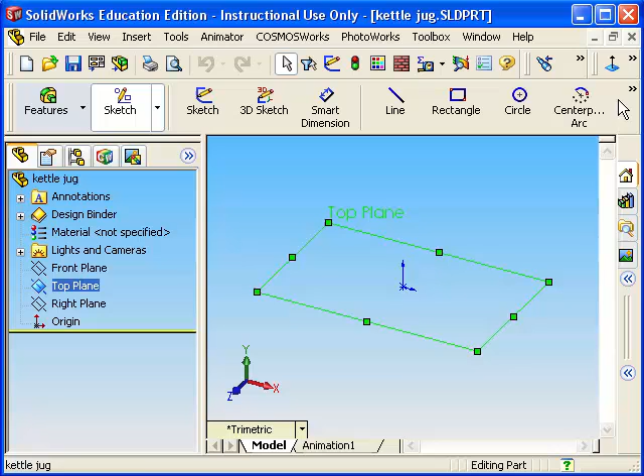After that, our next step is to pick our top plane, look normal to it, and select the circle from the sketch toolbar. Draw out a circle with the center at the origin. Use the line command and just trace out to get the sketch that's in the notes. You can see the auto snapping on for the right angle corner, and once that's done, we'll go to trim.

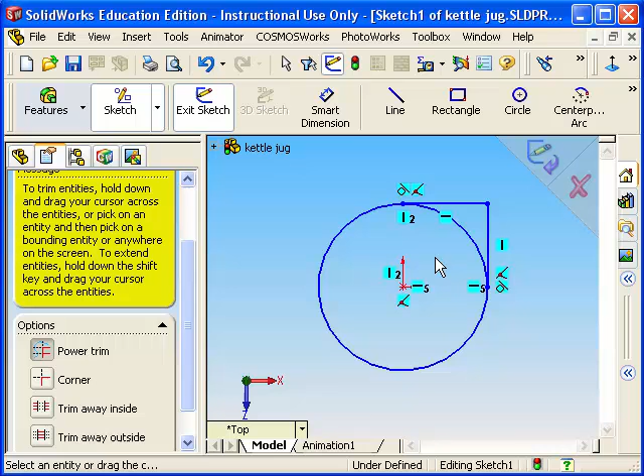We'll use the power trim by pressing the left button, and it draws a little grey line over, and make it cross over your line that you want to cut. Smart dimension the radius of the circle to 55 and rename the sketch by just clicking on it, then press F2 and call it base sketch.

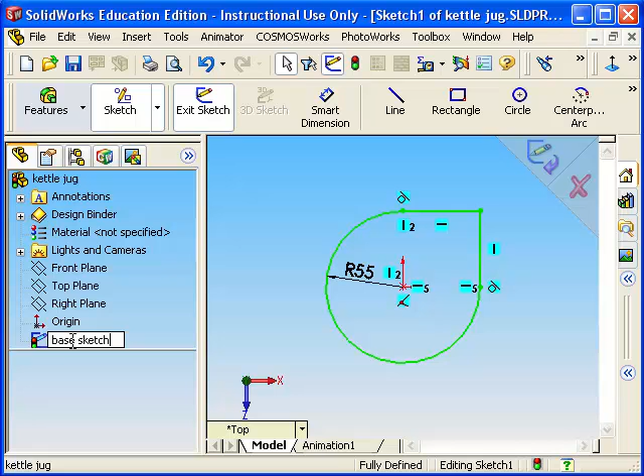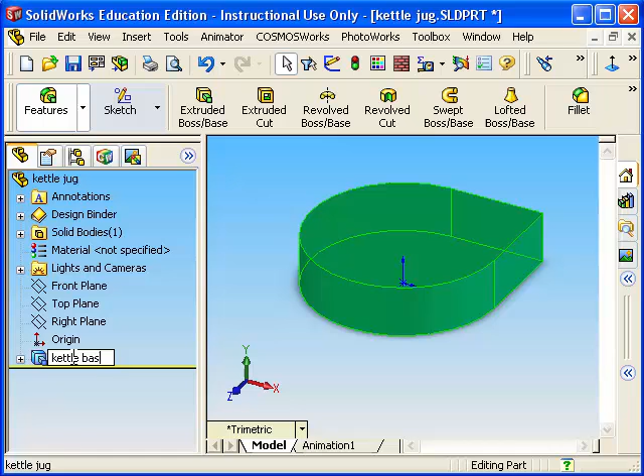Once that's done, features, extruded boss base, extrude in a blind condition 30 millimeters. Then rename the feature base or kettle base. Select the top surface by just clicking on it, goes green, look normal to it, and what we will do then is we will sketch a circle onto the top surface there, roughly the radius 40.

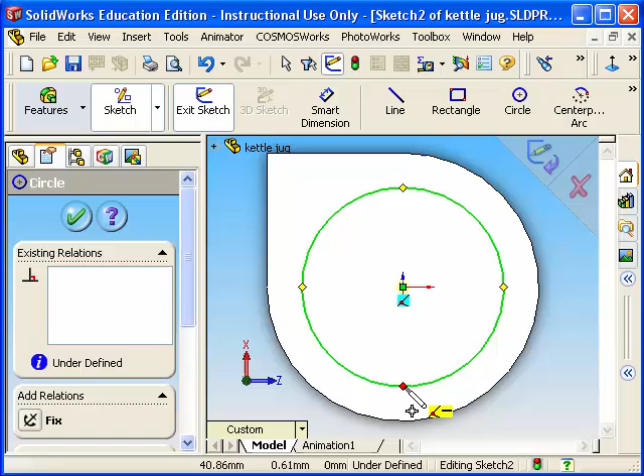Once that's done, we put a point on from our sketch toolbar at this location by just clicking. That will be used later for our spout, and then we'll smart dimension it to be diameter 80. Once that's done, rename the sketch, click on Sketch 2, hit F2 on your keyboard, and we will call it Body Sketch.

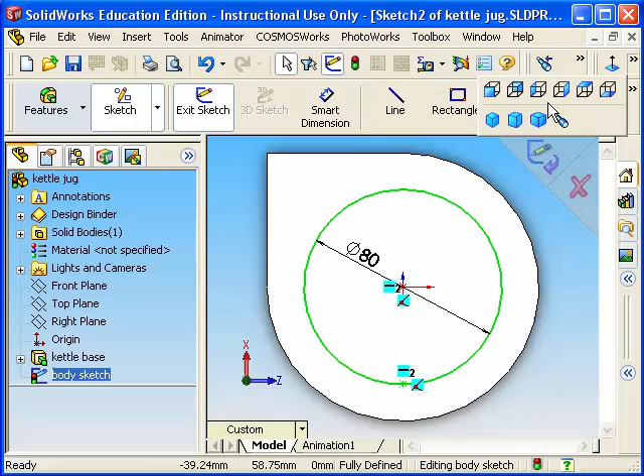And there we have it in 3D. Features, extrude boss base, blind condition, and 120 millimeters high. Tick OK, and we'll rename that then to be Kettle Body.

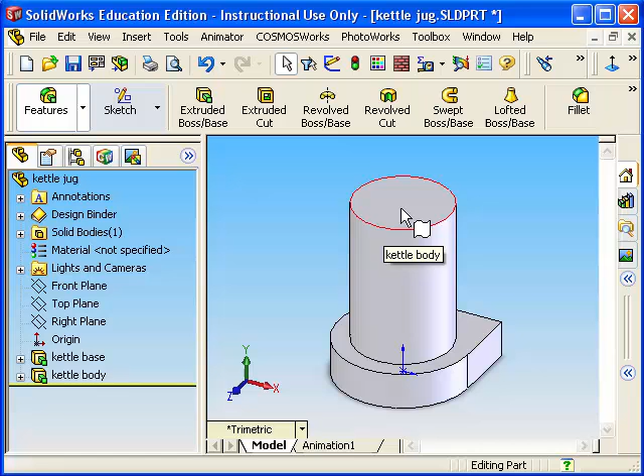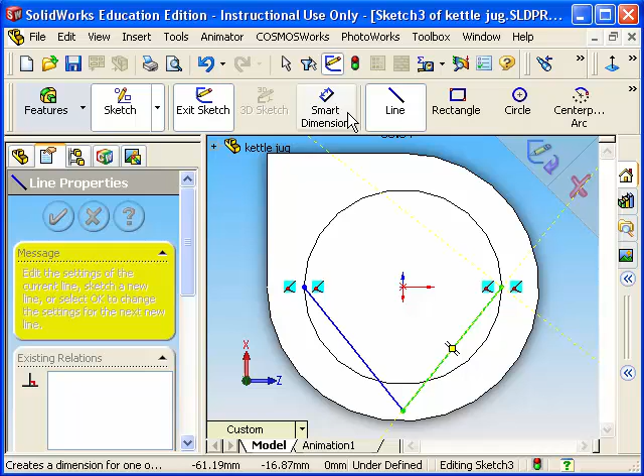Our next step is to select the top surface for creating the top part of the spout. We'll look normal to it. We'll select the line by going Sketch, Line. We'll come out to the left quadrant. We'll draw a line roughly down to here. Make sure that it's in line with the origin. You'll see the snap coming up, and complete it the other side. Once that's done, our next step is to smart dimension from the outer point to the origin, and we'll make it 55.

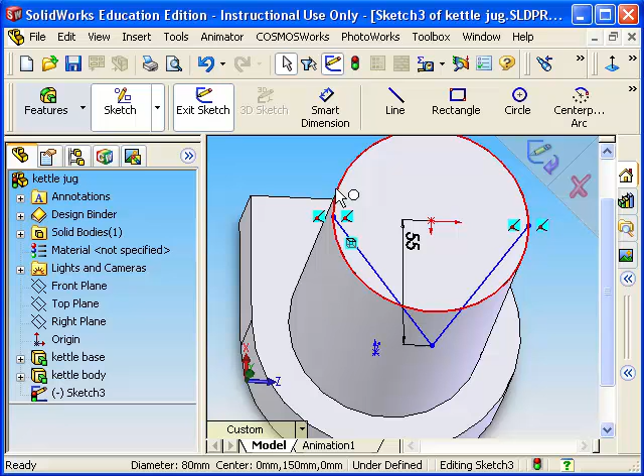Once that's done, we have to get a sketch around the edge of the top of the kettle here. So what we'll do is select the edge, Tools, Sketch Tools, Convert to Entities. What that does is it puts a line at the top edge that was there in the sketch. Now, our next step is to trim away our waste, so we would go to Trim Entities on our sketch toolbar. Same method again, power trim. Left click on the mouse, drag it over your line, and it makes it disappear.

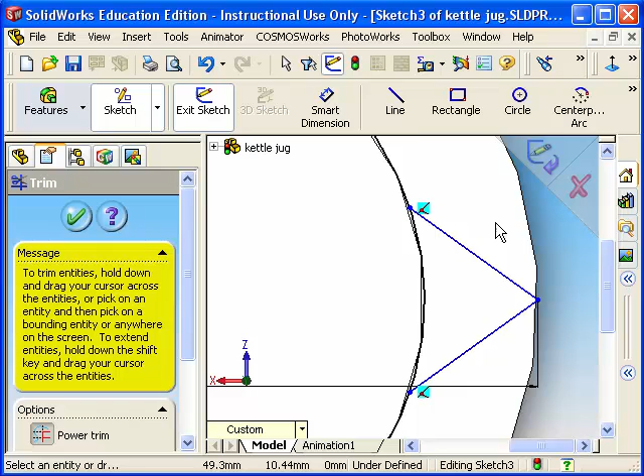Now, our final step is to try and fully define these points. So what we're going to do is we go to Add Relation, and we select the top half of the line here, and we'll just fix it. And we won't worry about the bottom half. Now, our next step is to create the spout. You can see the sketch is still active there. So what we'll do is we'll rename the sketch first. Top spout sketch.

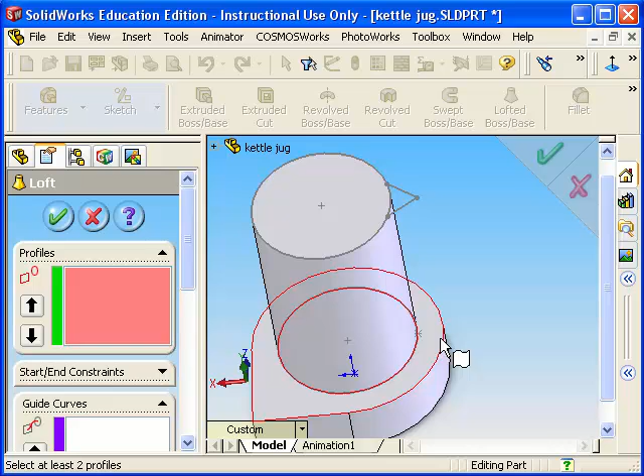Now our next step is to show up the sketch in the bottom, so right click on it and just go to show, and you can see the point has just shown up there. So features, lofted boss base, and we select the point at the bottom. Now what we're going to do here is select the region at the top, so you can just scroll down through the feature manager in the loft boss base and select the region there, and then out on the spout, and you see this preview of the spout popping up. Tick OK once you're happy with it.

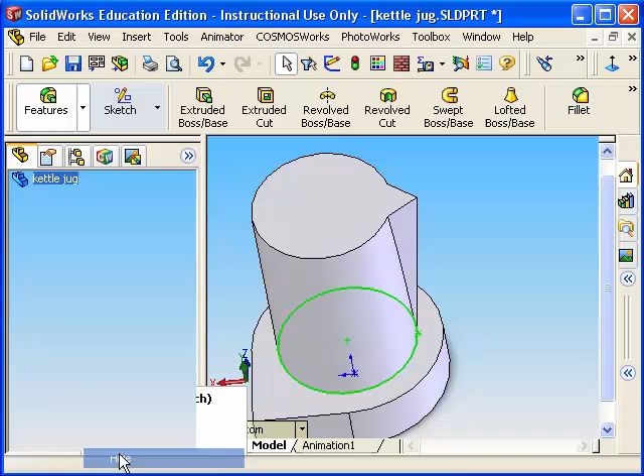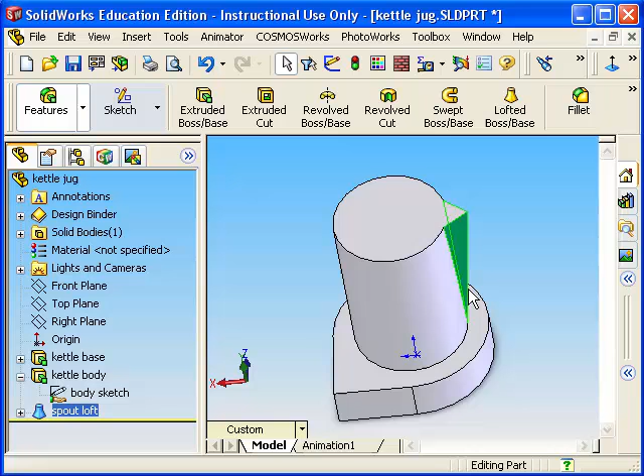Now you can see the body sketch is still showing, so right click on it and hide. And we'll just rename that loft, Spout loft. Following that, our next section is the shell. So we select shell from our features, and it will be a 1mm shell. So type in 1 and select the surface that we want to shell.

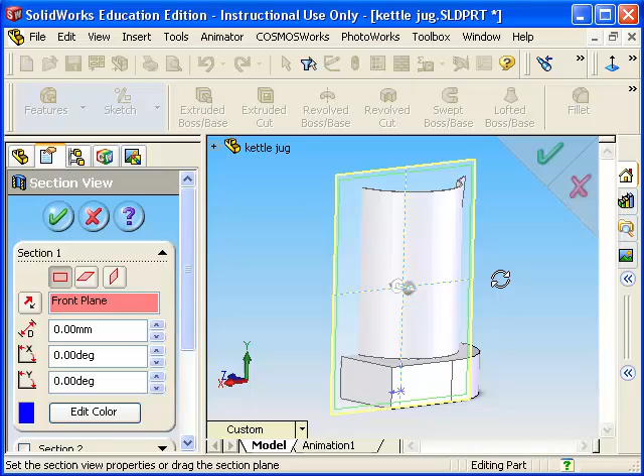Now our shell is going to be slightly different here. I'll just show you why. So we'll just tick OK, and you can look down and you can see that it's hollow. And I'm just going to open a section of it just to show you something here. Now, down at the bottom here, we want the base of our kettle to be solid, but it has been shelled out. So what we'll do is we'll just knock off the section there and we'll delete the existing shell. So just right click on it and scroll down to delete.

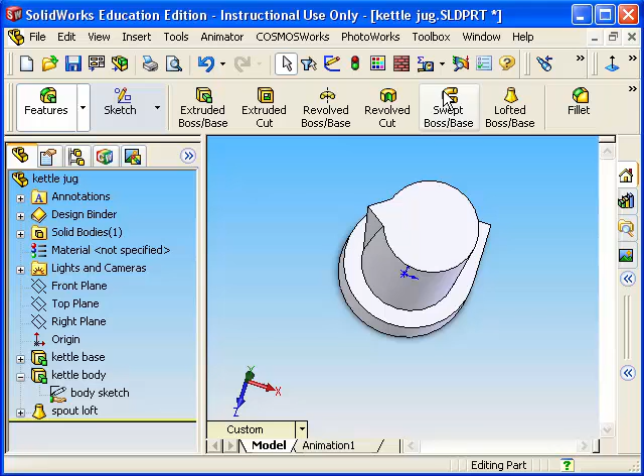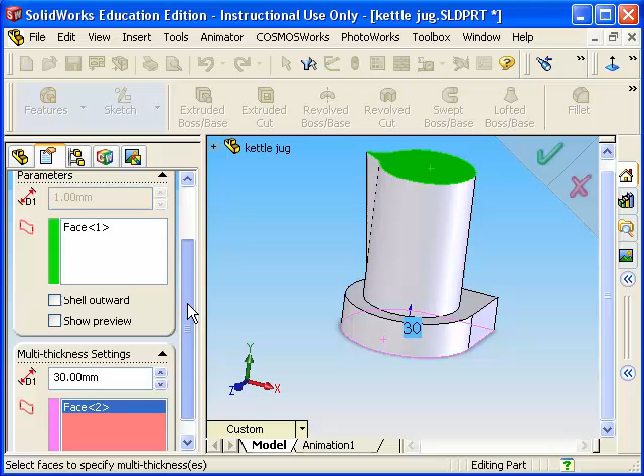Now once that's done, we'll just open up shell again, and we're going to use a multi-thickness shell. Same again for the top, and just scroll down here and you have multi-thickness settings. So we'll just click down here, that's the face that you want to keep, so we want 30mm thickness at the bottom, and we select the base. And then tick OK, and we'll just have a look at it in the section again. We'll just rename it Shelled Kettle.

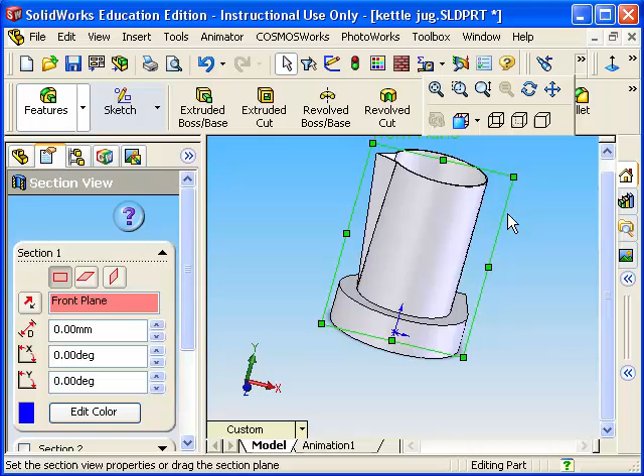Look at a section of it, and you can see there that the base of it now is solid. And that's what multi-thickness lets us do. Now our next job is to put on the handle, so we look at our front plane, normal to. We'll open up the sketch toolbar and recreate the sketch that's in the notes.

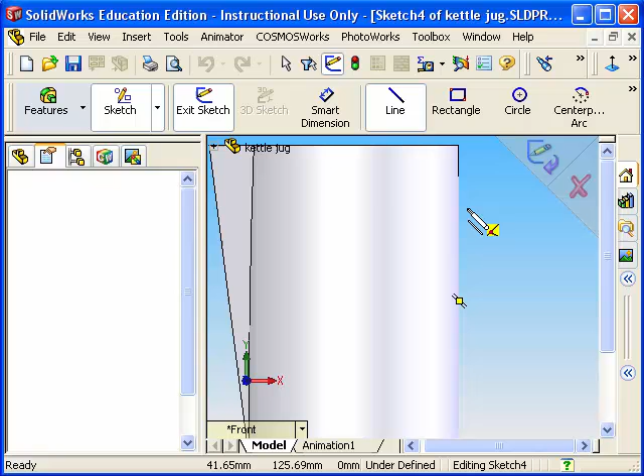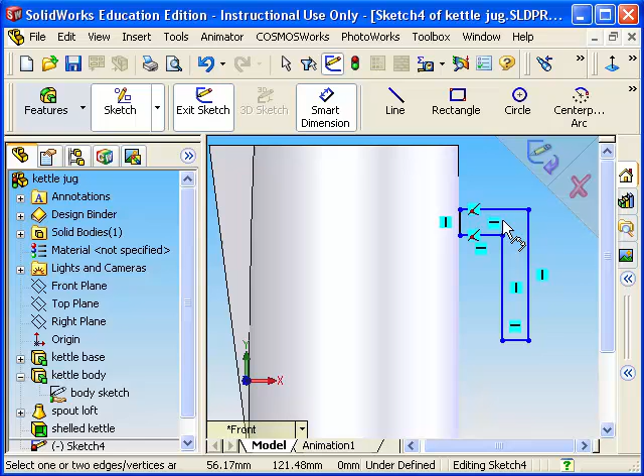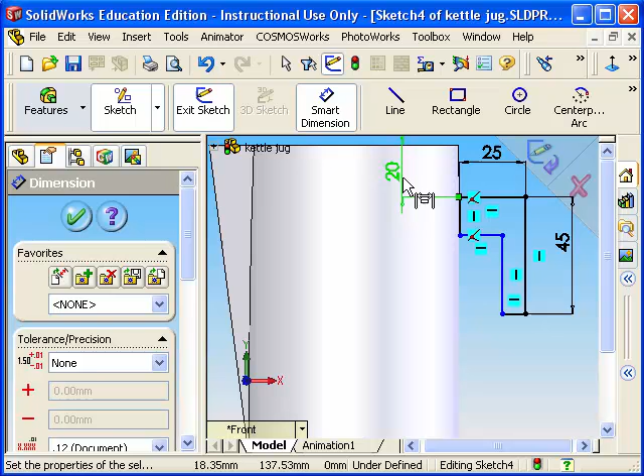And don't forget to close the profile. Now once that's done, we smart dimension it with the dimensions that are given: 25, 20, 45, 10 and 10 here. Now you can see our sketch. Our next job is to rename that sketch, and we'll call that handle sketch.

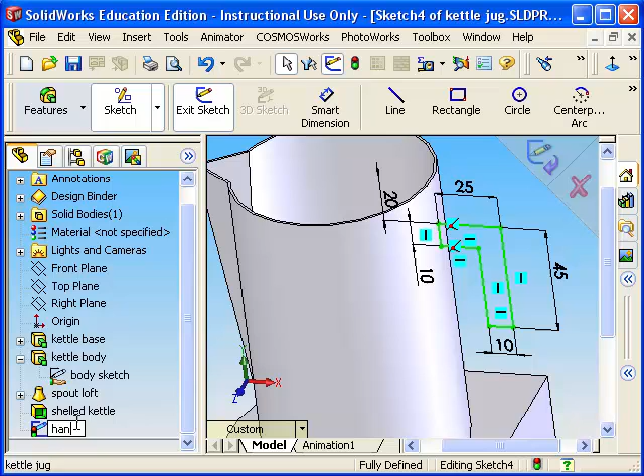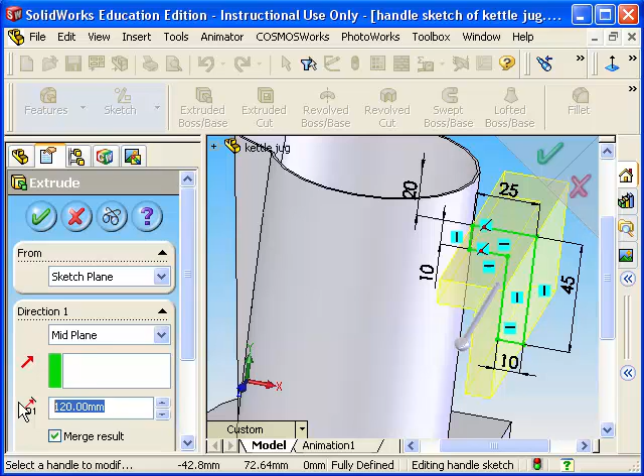We will extrude then in a mid-plane condition. You can see there it's over emphasized, but that it doesn't line up with the full body of the sketch. So what we'll do is we'll just make the thickness that we want. There will be a little gap that we'll just zoom in on. Now we'll just rename it extruded handle.

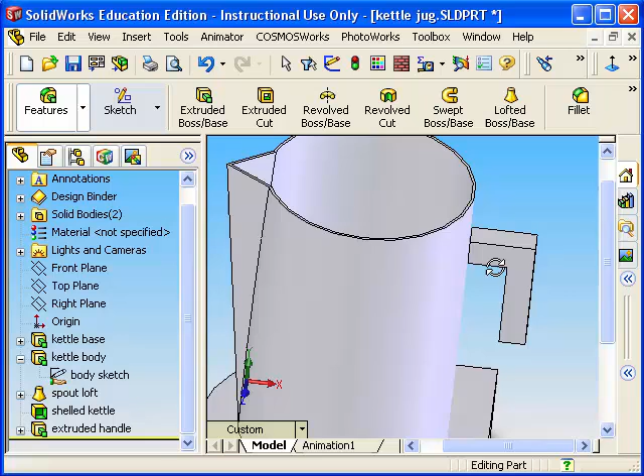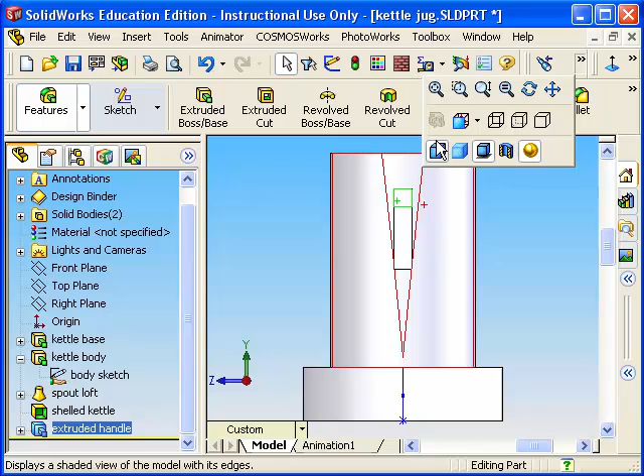And since it has been extruded, you can see that there's a gap between the handle and the curved body of the kettle. So what I want to do here is we just zoom in and we select the surface there by just clicking in on it, and we look normal to it, and we look just around from the other side. Then we're going to look at it in a wireframe model with hidden detail.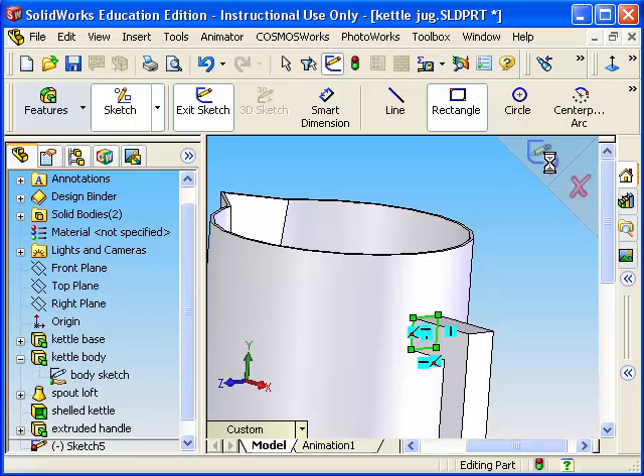And we'll just zoom in up here, and we're going to recreate a sketch of a rectangle. So just select one of the corners, drag it to the other corner, and that's your sketch. It will be fully defined. Then we'll just turn it back on shaded with edges. And we'll rename the sketch first, and we'll rename that sketch handle face sketch.

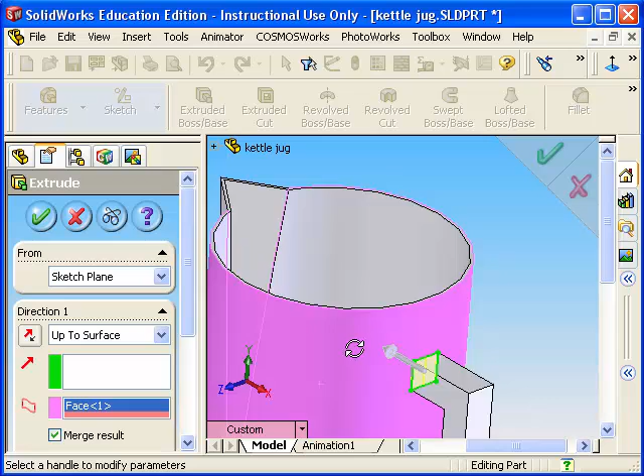Once that's done, we will then extrude up to surface. So you just choose up to surface and we select the curved surface, and what it does is it fills in the little gaps there. And we rename that then handle face extrusion.

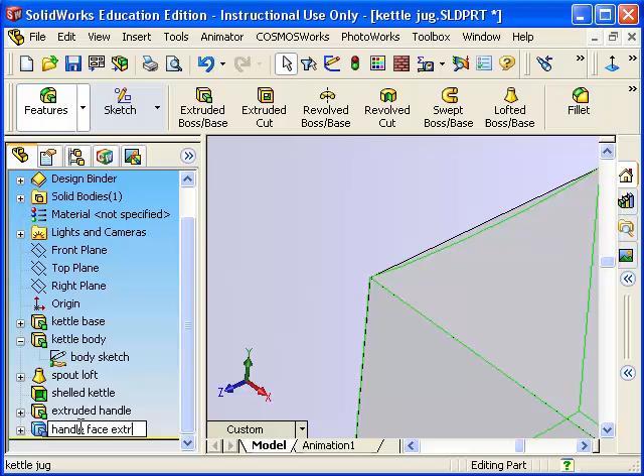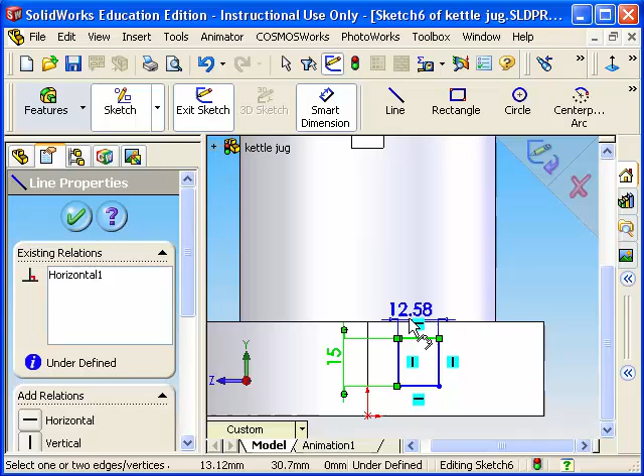Our next step is to put on the buttons for the kettle, and we select this face down here, and we look normal to it, and just zoom in on it a bit. Sketch a rectangle down here for one of the buttons, and we just smart dimension it with the dimensions there: 15, 15 again, then 8, and 12.

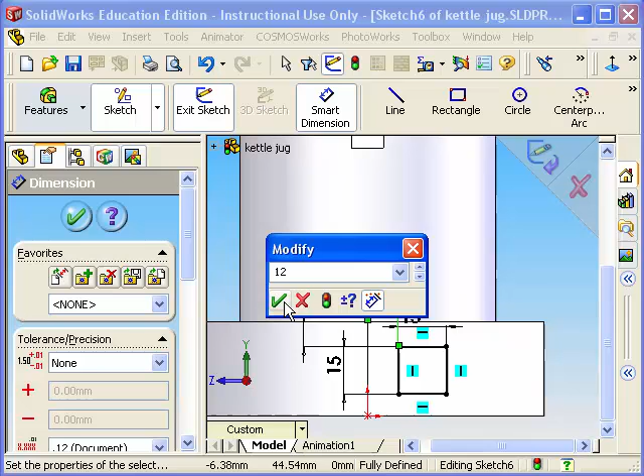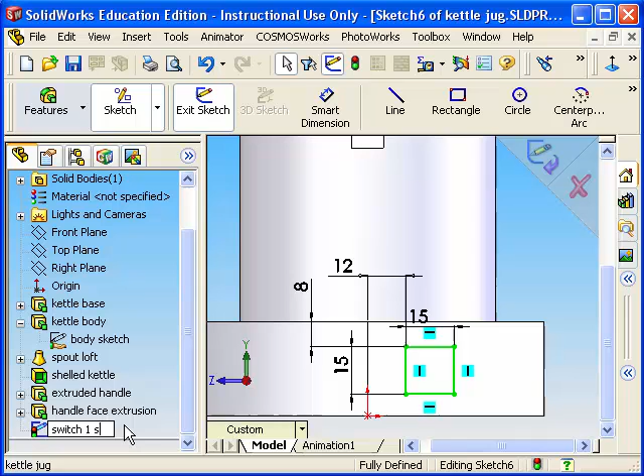Now, once that's done, we'll rename it first. So we'll call it Switch 1 Sketch. Click on F2 on your keyboard. And then Features, Extrude Boss Base, and 6mm. And there it's extruded, and we'll rename that Switch 1 Extrusion.

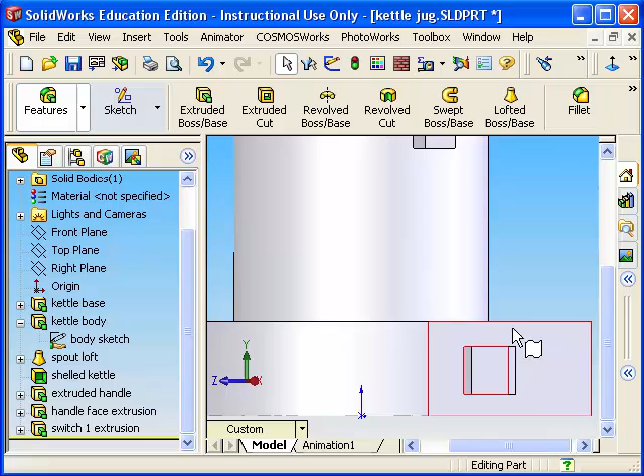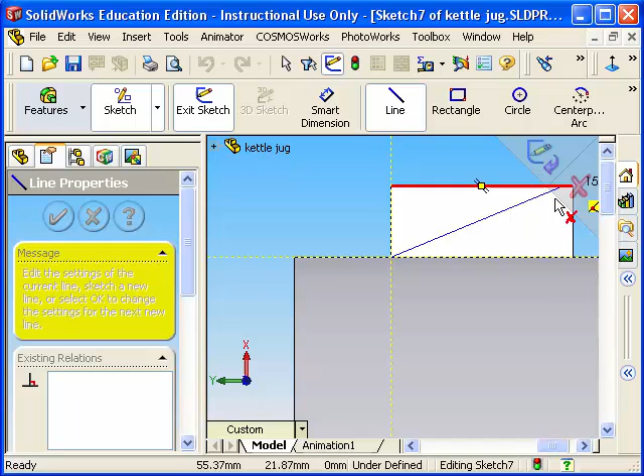Now that that's done, we'll look at the side surface of the switch, select it, and we look normal to it. And we're going to cut away half of that. So we'll go Sketch Line, join one corner to the other. Now, once that's done, we'll call that Switch Surface Sketch.

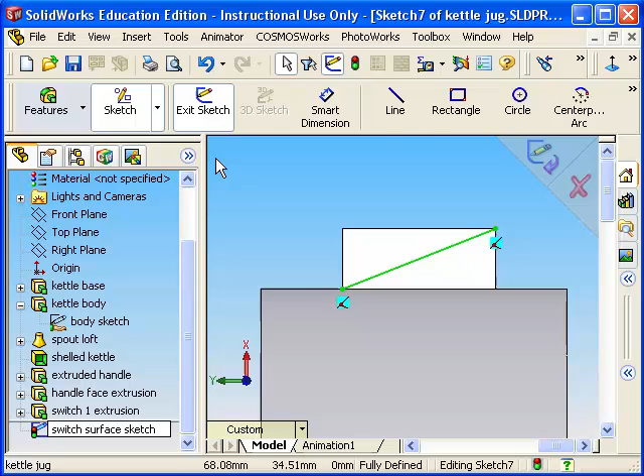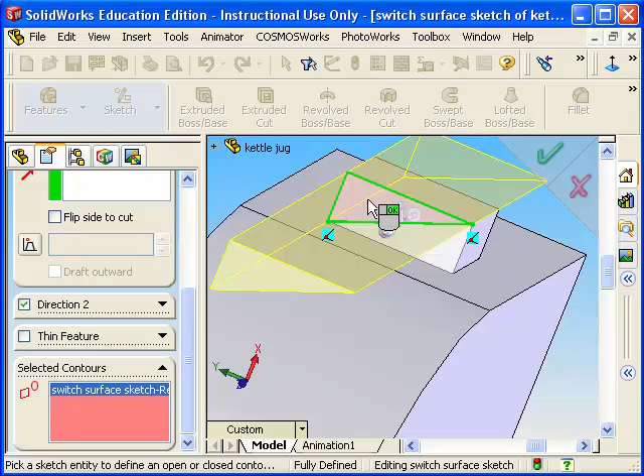Another option with that would be to draw the full profile around of a triangle, and then it will be a cut extrude. So we're going to go Features, Extruded Cut, and this time it will be through all. Now we're going to scroll down in the Feature Tree to Selected Contours, which is regions that you can cut, and it lets you pick. And we'll just pick the upper half there, and you can see a preview of it done. And we'll call then that Switch Surface.

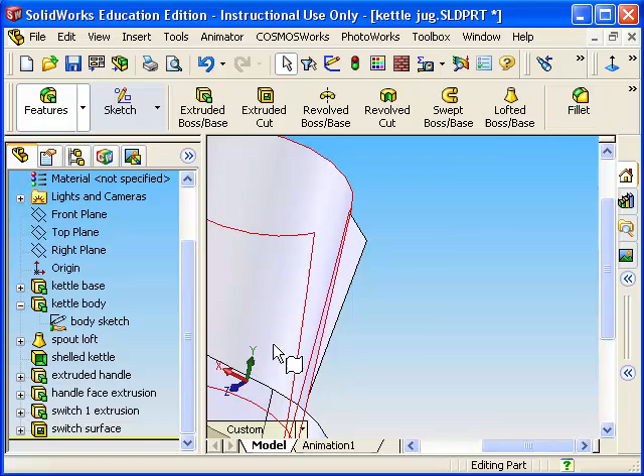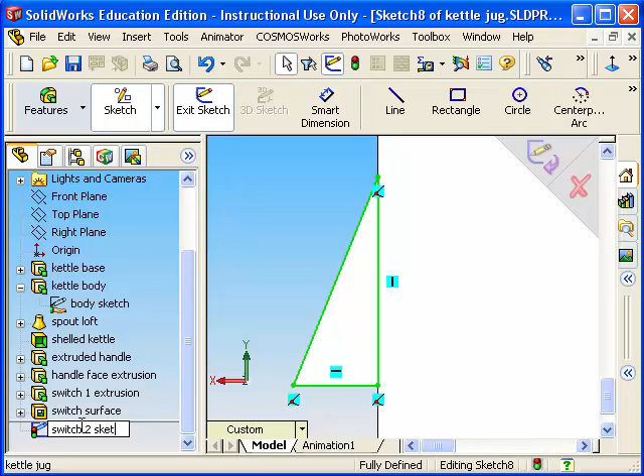Once that's done, then we select the side surface of the switch, look normal to it, sketch, and we just draw out the outline of the profile with the line command. Create a triangle, and then we rename that sketch Switch 2 Sketch. Followed by that, then we extrude it 15mm. Now it's important once it's 15mm extruded, to knock off merge result, because it will join the two switches up and you won't have a line of definition between the two of them. And we just rename that Switch 2 Extrusion.

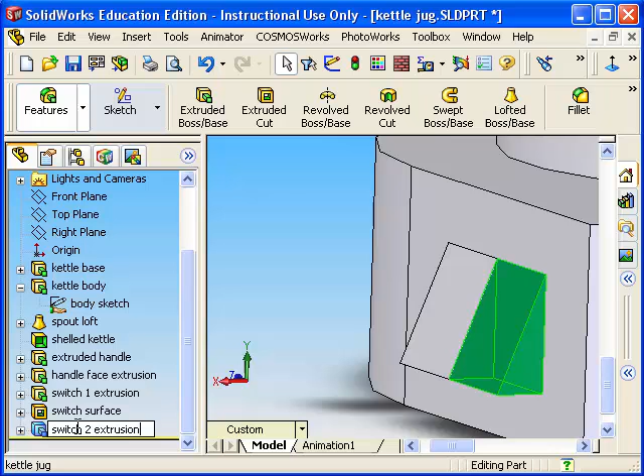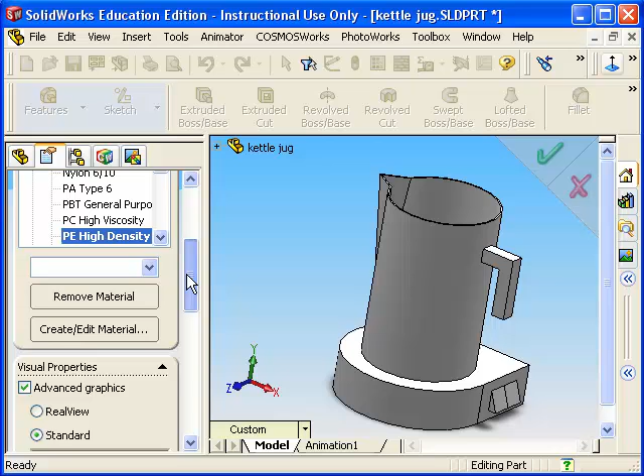Now our next step is to edit the material, and we right click and edit material, pick plastics, polythene high density, and we'll just tick OK. And we'll turn on the RealView graphics. Now tick OK, and there you have it. Now to put colour on, RealView graphics won't let you do it, so just knock off the RealView. That's the little golden ball symbol.

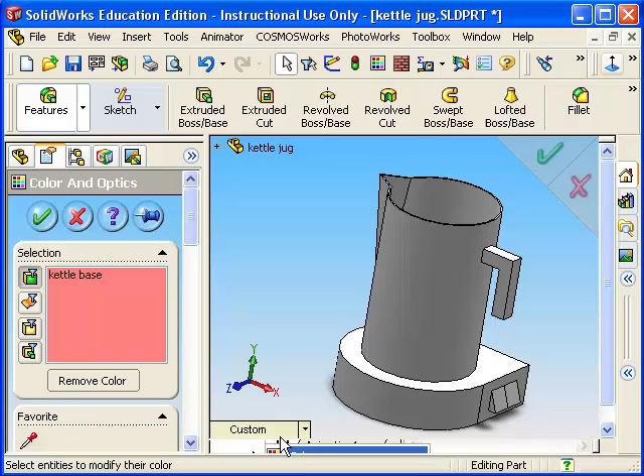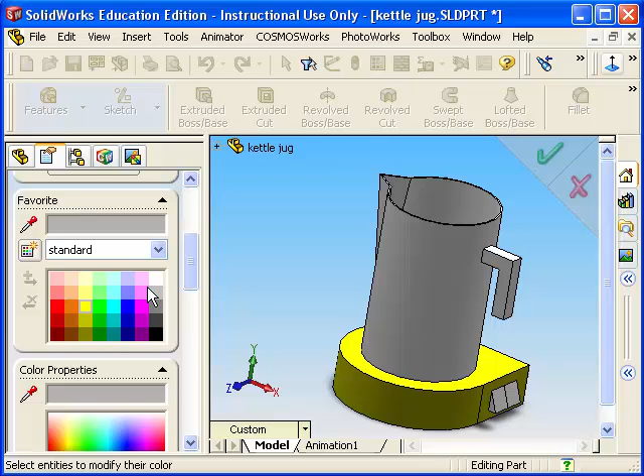And we'll select the kettle base first, right click on it, and then scroll down to appearance and colour. We'll pick a dark yellow for it. And once we're happy with that, tick OK. After that, I'm just going to left click and highlight the rest of the body from the switches, right click, appearance and colour, and then pick a lighter yellow and just tick OK.

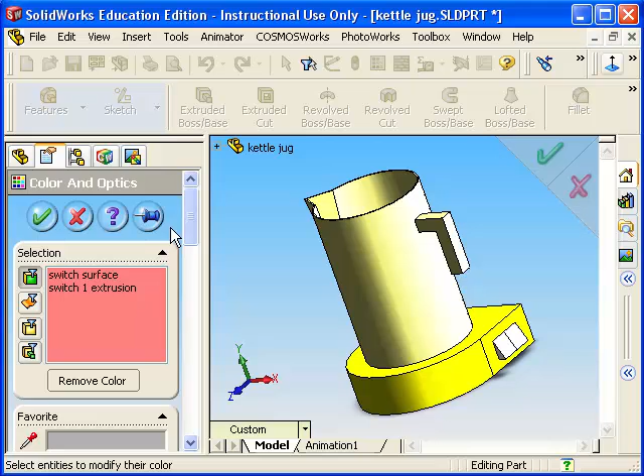Now, the next thing is to colour the switches. So switch 1 and switch surface are parts of the same switch. So just left click, create a box around them, highlights the two of them, right click, then come down to appearance and colour, and then just pick red. And repeat the same then for the last item. You can right click on it, appearance, colour, and then just pick a green. That has your kettle done.

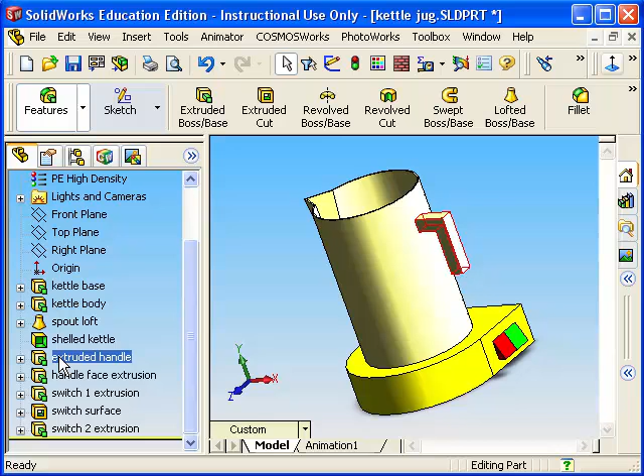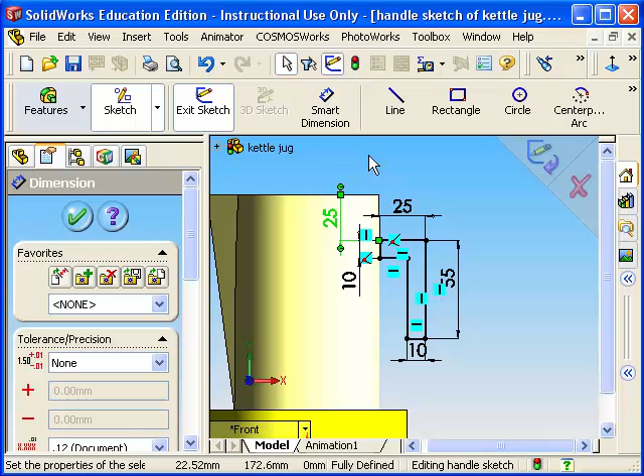Now our next step here is to change our extruded handle, so we just right click on the extruded handle and we go edit sketch, and it opens it up here for us to change the size of all the items by just double clicking on it. And you can change them to the sizes that need to be changed. And there it's done.